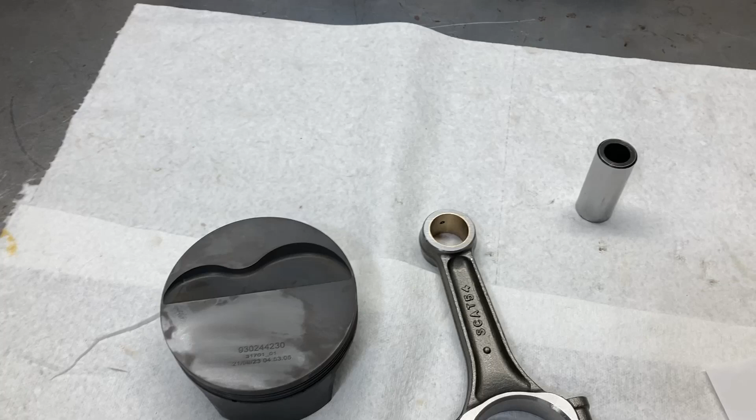Was it last week? I think we started a series on basic engine building techniques and theory and all that stuff. And this week I wanted to build on that by going over piston compression height and rod length, and thinking outside of the box on a given engine build.

And the reason why I decided to do that today was I got this piston rod assembly in for a Ford 289 build that I'm doing for a customer for a Shelby 289 Cobra build. And we are building this engine as numbers matching and period correct on the outside as we can possibly get it. And on the inside, we're going to employ a whole lot of new age engine technology and building techniques. So that would include roller cams and Mahle pistons, with a modern ring pack and that sort of thing.

So this is a piston for a Ford 393 Windsor, which is a stroked 351 Windsor. So if you're wondering how in the world can Brent use a piston that's for a 393 Windsor, which is a 9.500 deck, how can he use a piston for that in a Ford 289, which is an 8.200 deck, and the stroke is different and everything else? Well, we're going to go over that right now.

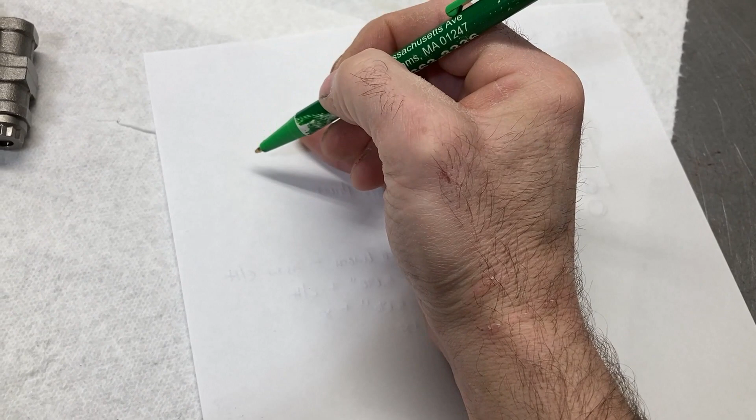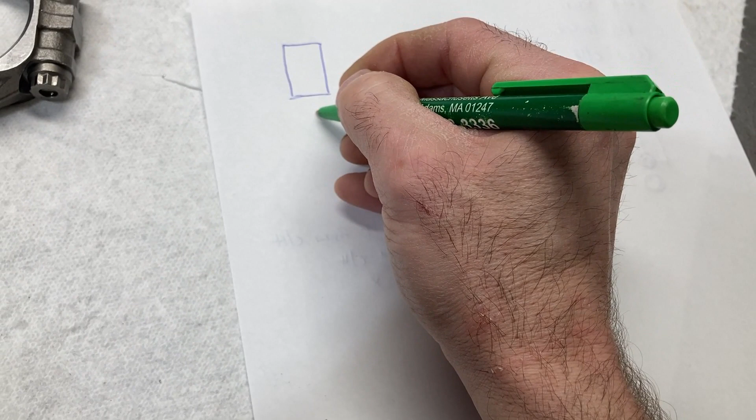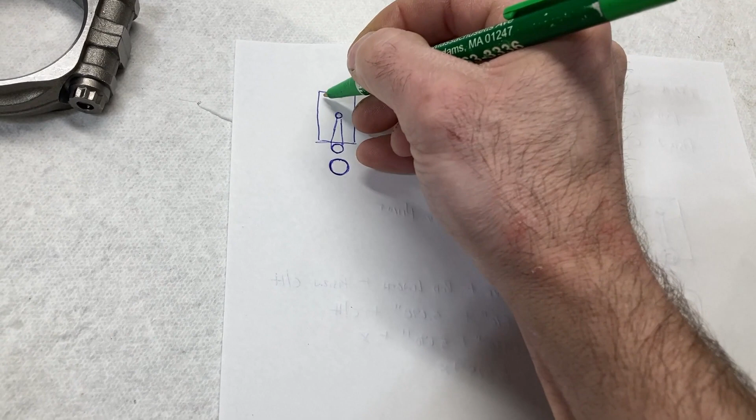So for any given engine combination, you have a block deck height. The definition of a deck height is from the center line of the main to the top of your block deck. So if you think of a traditional V8, and I'm going to turn it upright, and this is your cylinder, okay? I'm not an artist, keep that in mind. We will say that this is your crankshaft center line. So your rod throw would be somewhere around in here, and you would have a connecting rod with a little end, and then you have your piston. There's your wrist pin. Very crude, I know.

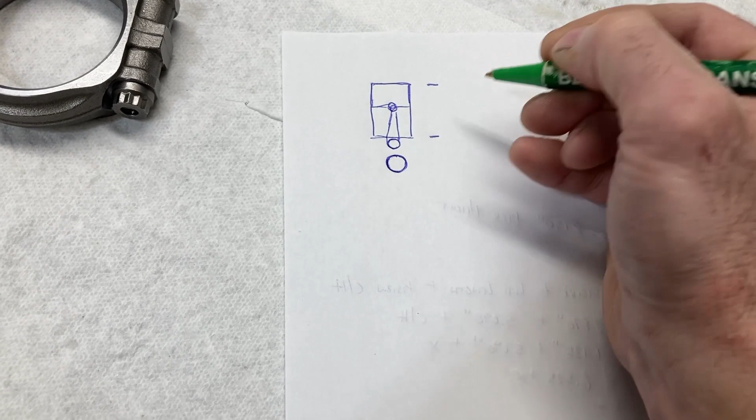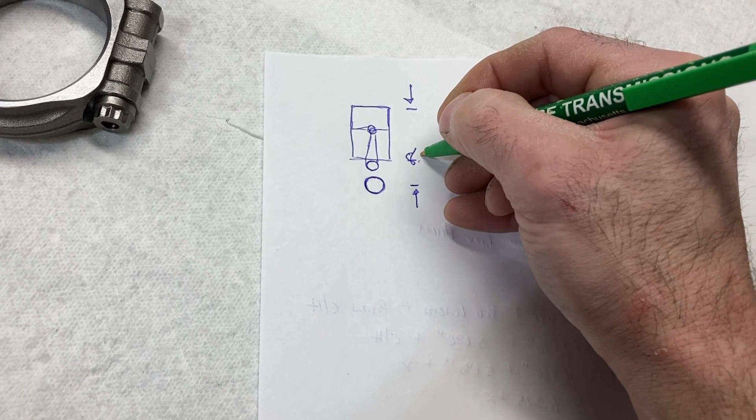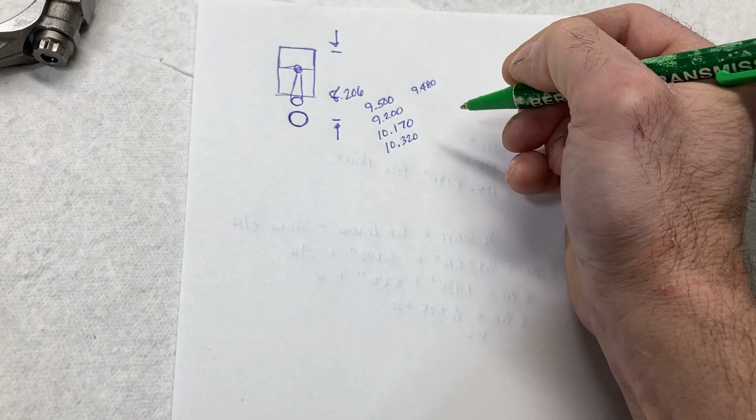So deck heights, actually that should be down here. Your deck height varies depending on what block you're using. A Ford 289 or Ford 302 is generally listed as 8.206. A 351 Windsor, as we mentioned, is 9.500. A 351 Cleveland is 9.200. An FE is 10.170. And we'll come back to this. Early Windsors were actually also 9.480. Your 385 series stuff, like your 429, 460, they had a couple. 10.320 is pretty common, but that is, again, the measurement from the center line of the crankshaft to the top of the block deck. That is your constraint.

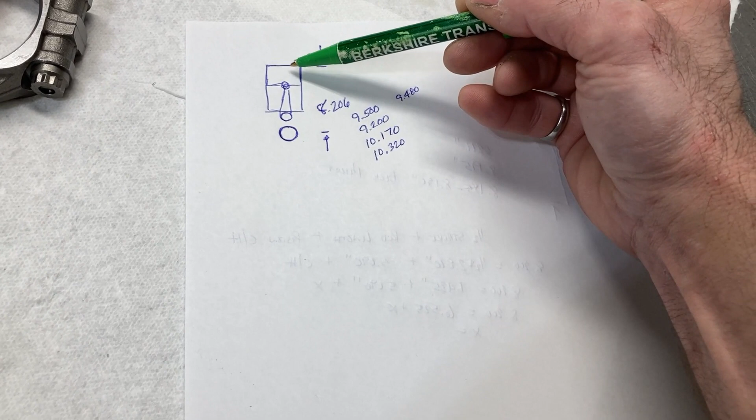That is the amount of distance that you have to fit a connecting rod, a piston, and by definition, half your stroke. So when you think of it that way, I've got so much room, and I've got half stroke, and I've got my rod length, and I've got my piston compression height, that's going to equal block deck height.

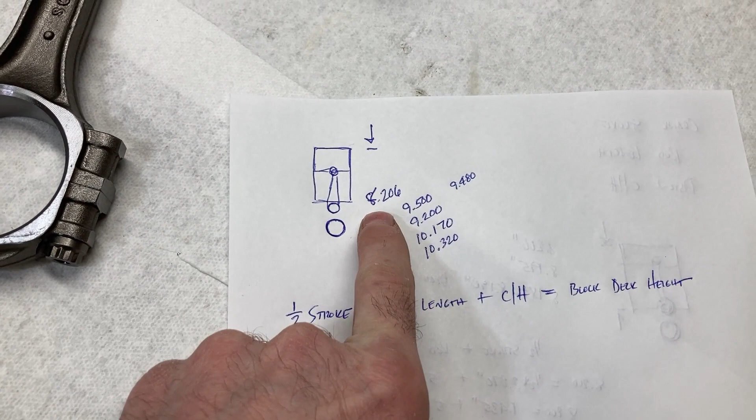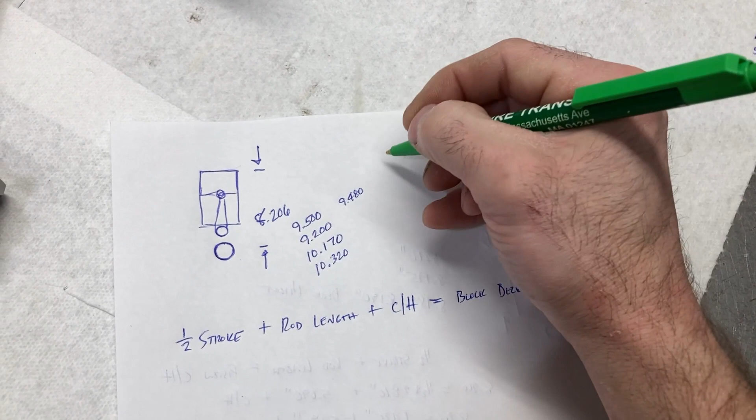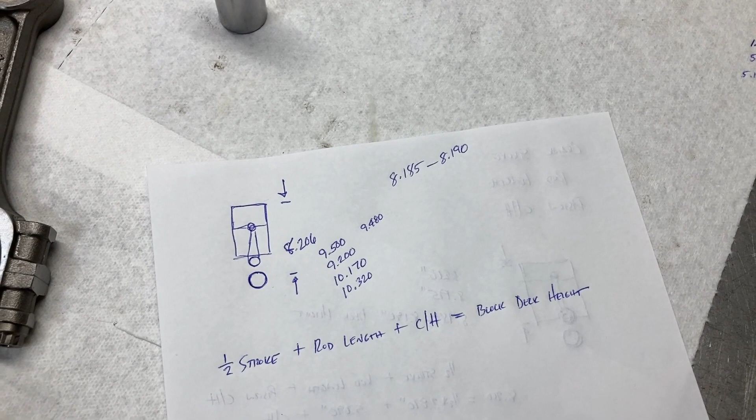Now, in this particular build, I am using a 289 block. Like I said, from the factory, they're listed as 8.206. I've seen those all over the place, because factory blocks are not known for machining tight tolerances, and sometimes they're out 20 thousandths from front to back, and sometimes they're a whopper-jawed mess. So what I do is I have my 289 and 302 blocks generally machined to 8.185 to 8.190, and that generally gives me enough room to counter any bad machining techniques that the factory had back in the day.

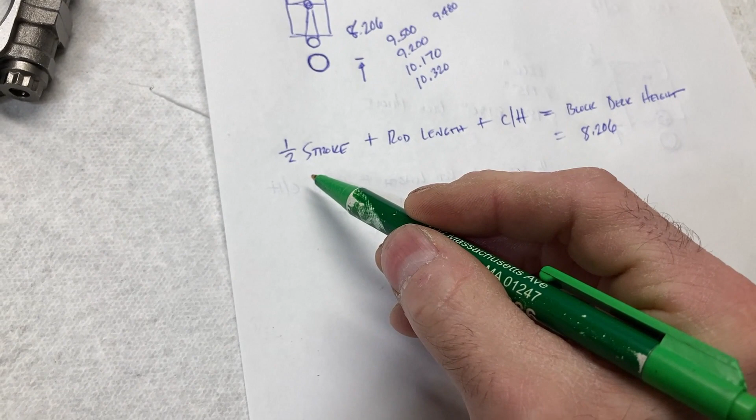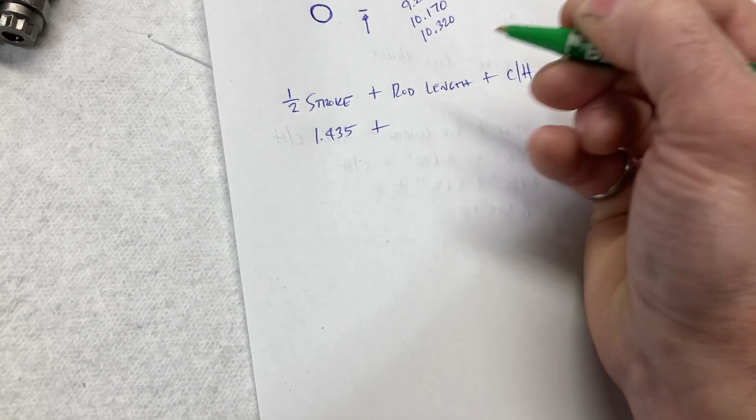So for this particular build, let's do this first. We'll take the factory block deck height as listed, and let's look at a factory 289 piston compression height. So half the stroke: a 289 stroke is 2.87. Half of that is 1.435. A factory 289 rod length is 5.155.

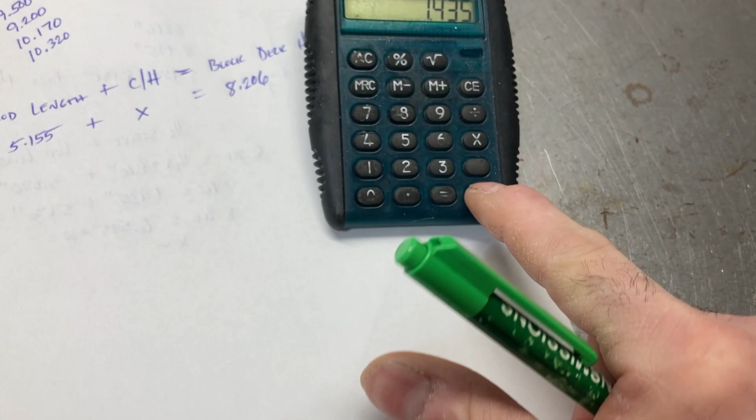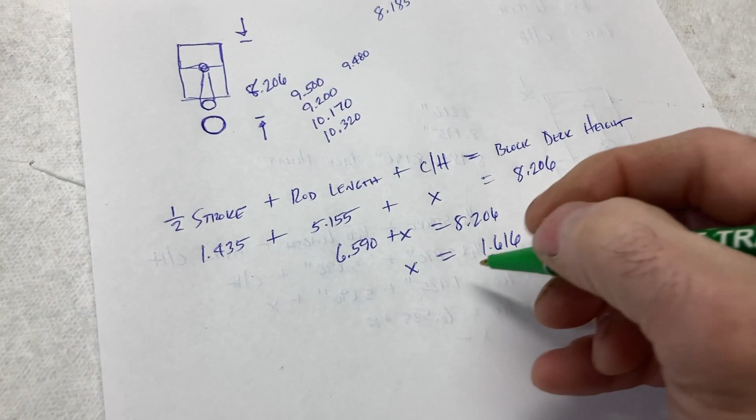We're going to solve for X. So get our handy dandy calculator. We have 1.435 plus 5.155. That's 6.590. Plus X equals 8.206. So our compression height for a factory 289 piston should be 1.616. And if you look in the catalog, you will generally see that factory piston compression heights were around 1.600.

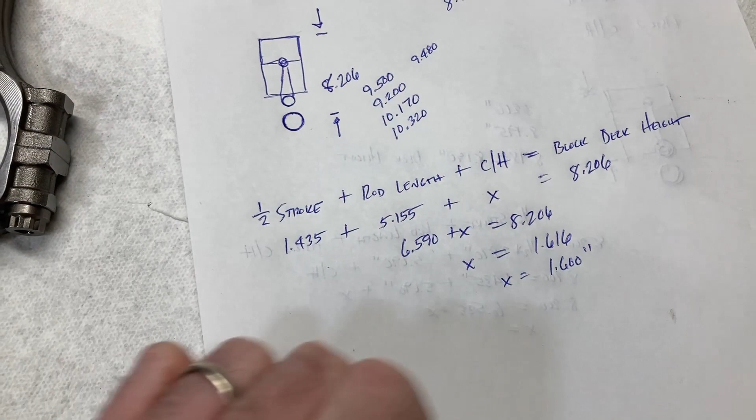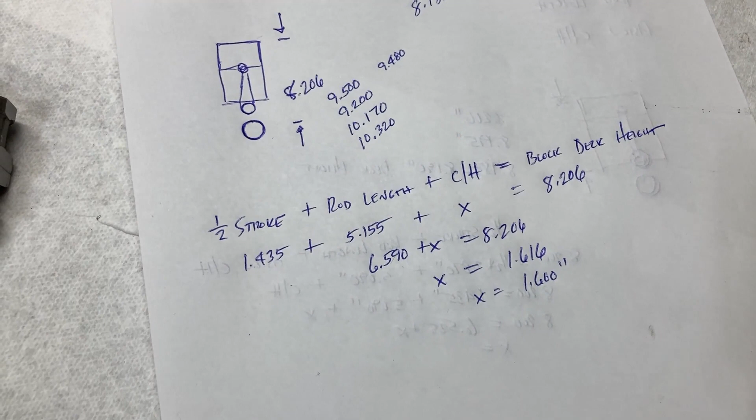Okay, and you have machining variances in that. You have the fact that your piston is probably going to be down in the hole a little bit, so your factory pistons are going to be around that height. I like to see pistons at either zero deck or a little bit hanging out, and that's generally what I aim for. But let's look at why this and this will fit in our 289 block.

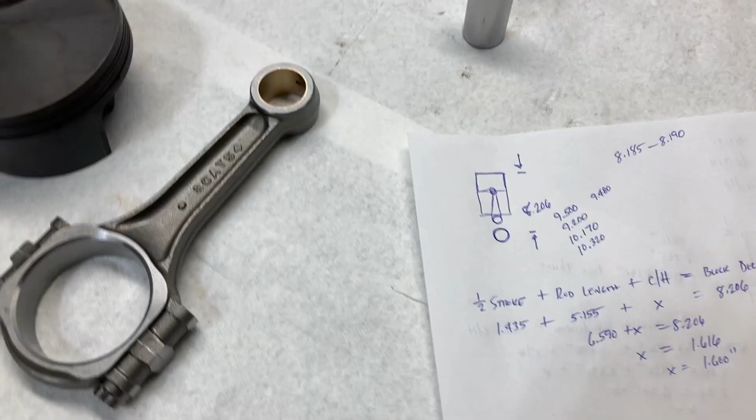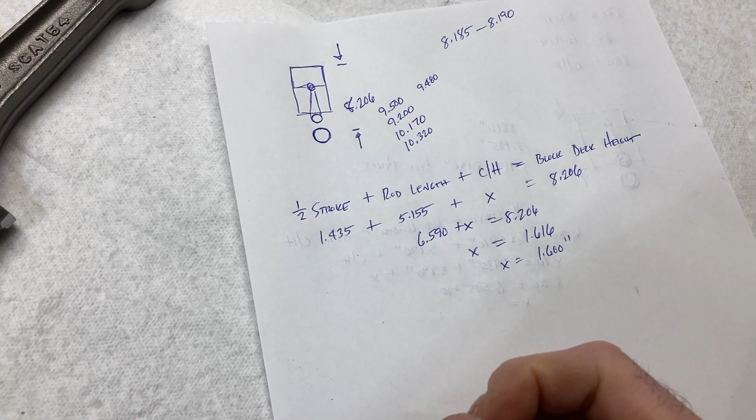Again, this is a piston for a Ford 393 Windsor. This is 1.350, okay? This is a rod for our build. It's a Scat rod. It's 5.400. So let's look at the math on why this is going to work out. So we will use our block deck height of 8.185.

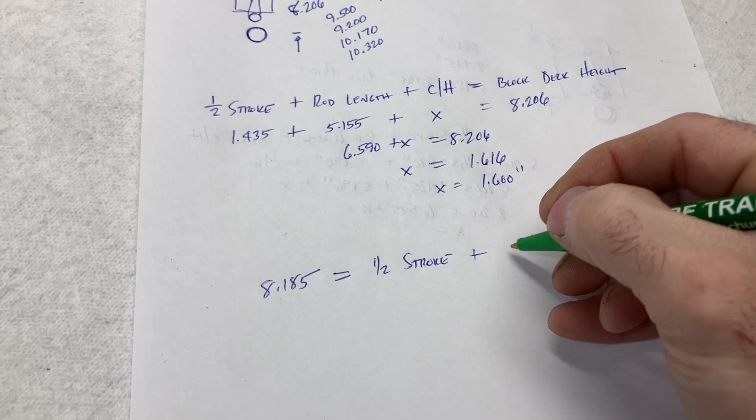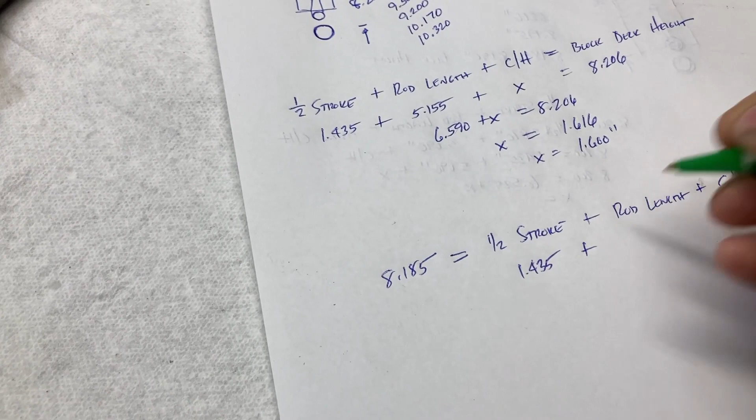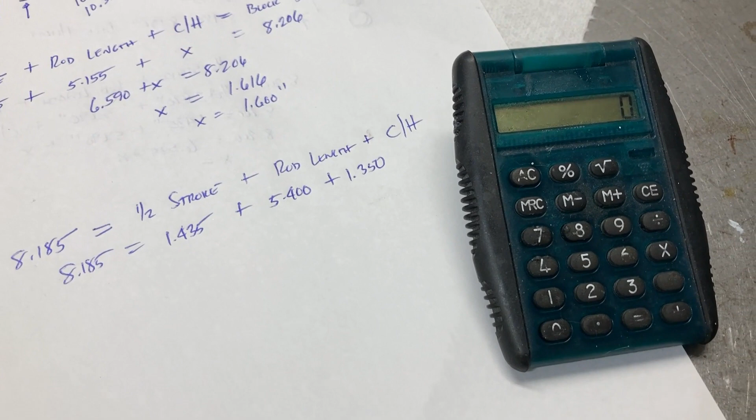And that's going to equal half our stroke plus our rod length. I don't know why my camera keeps going in and out of focus. Plus our rod length plus our piston compression height. Half stroke, 1.435. This is a 5.400 rod and a 1.350 piston. So when I add all this up, I should get our block height, our deck height, and it should be at 0 deck. So let's do the math.

I generally try to use the longest rod and the shortest piston that I can for a factory build within the constraints of safety and longevity. I like longer rods; from experience, they give more torque. And as a matter of fact, in past 289 builds in some road race stuff, I have used a 5.700 rod. And it was a small block Chevrolet rod. It took a lot of extra machining, took some specialized bearings, and it took a really short piston to make that work. But it made a whole lot of torque.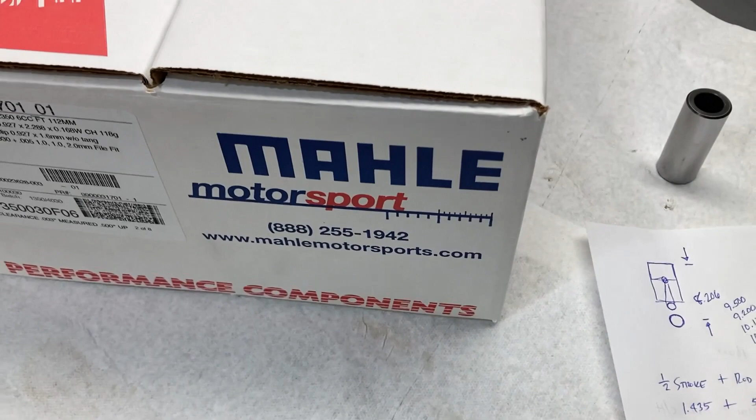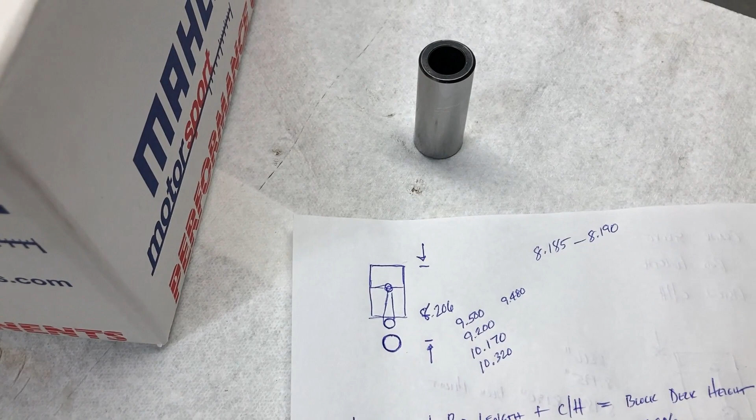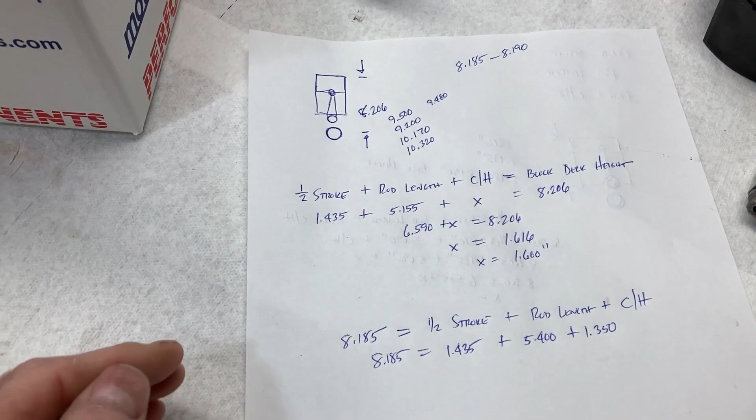So if you learn to think outside the box, when you see a piston compression height, this one's listed 1.350, you shouldn't think, oh, well, that's a 393 Windsor piston. Well, it is a 393 Windsor piston because it fits within the constraints of our 9.500 deck and a 6.200 rod. But this piston doesn't know that it's a 393 Windsor piston. All it knows is it's a piston. And this compression height may work with other rod and stroke combinations. And when you're able to think outside the box, then you can use lighter pistons, you can use longer rods, or you can use different combinations than what you're generally used to thinking about.

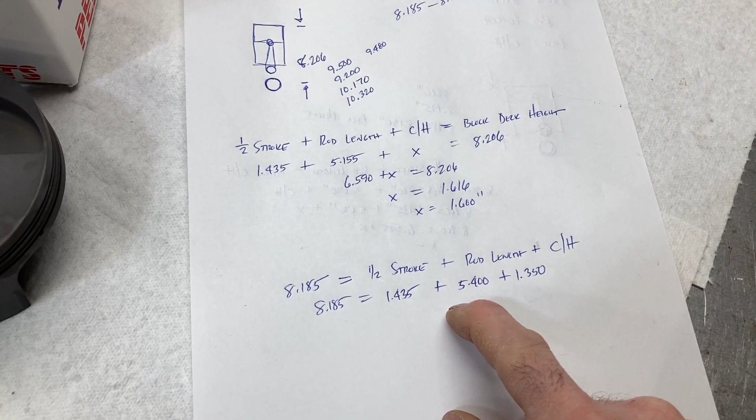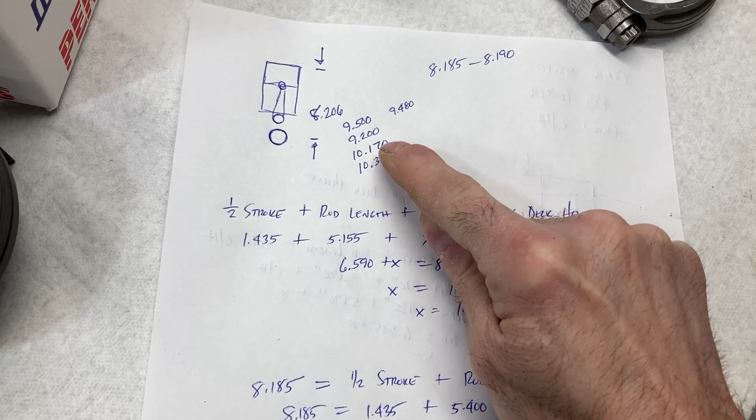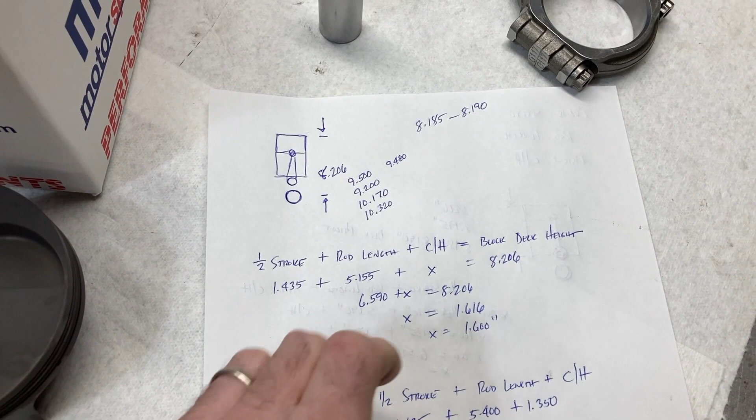This calculation also helps when you're dealing with a block that's been decked a lot, and sometimes when we're messing with some old factory blocks, they've been whacked really hard. So, like I said, on an FE, 10.170 is factory deck height. I have had FE blocks that came in at 10.135 because they have been cut so many times. So when I order custom pistons, I have to go through this calculation to see what compression height and rod length I can use to make the application work.

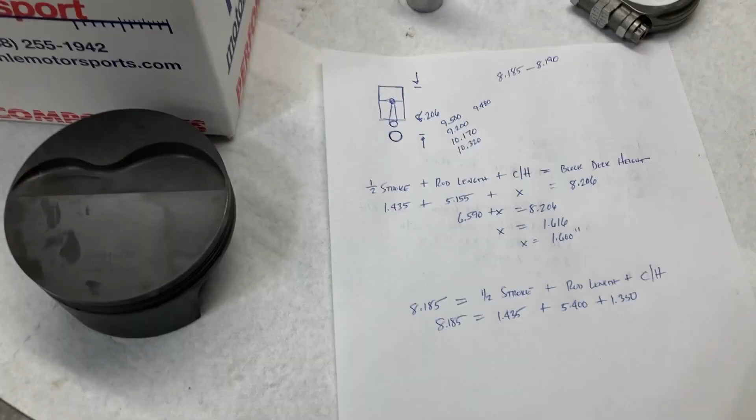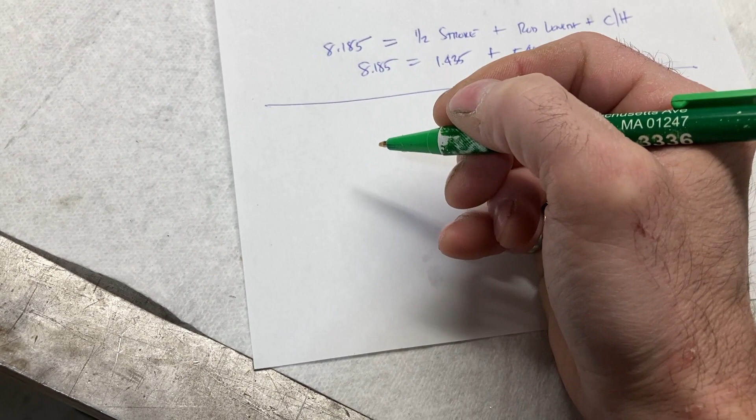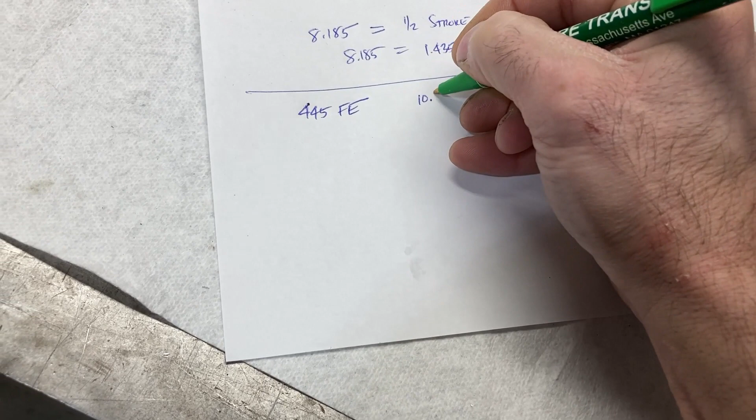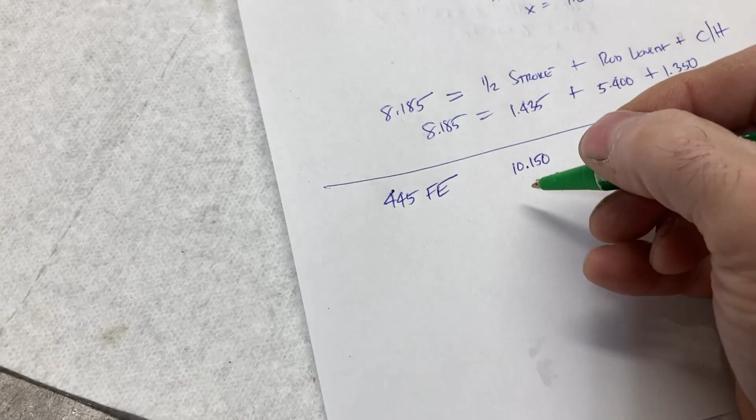So in school, they teach you by repetition. So let's go over a couple of different scenarios. Let's work with a 445 FE. 445 FE, we know that the block deck height from the factory is 10.170, but generally I have those cut down to 10.150 just because of factory tolerances and how horrible they were. We know that a 445 is a 4 1/4 stroke crankshaft. So let's look at a couple of different things.

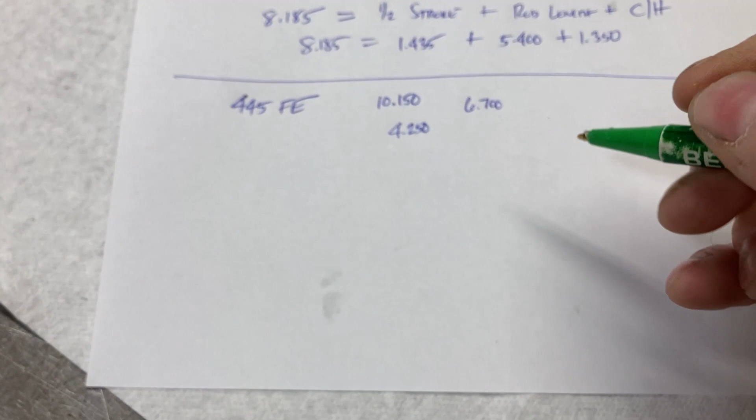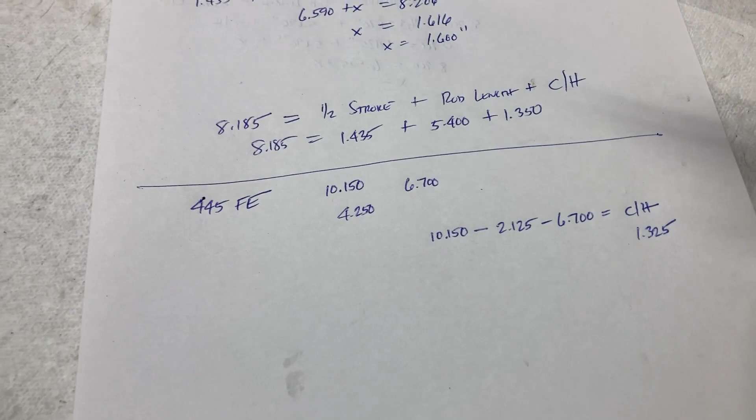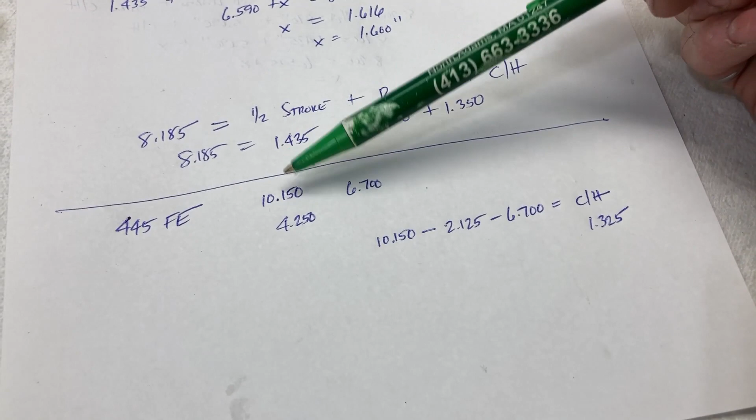If we used a 6.700 rod, let's do the math. So 10.150 minus half of our stroke, which is 4.250, so 2.125, minus 6.700, that should give us our compression height. So let's do some math here. 10.150 minus 2.125 minus 6.7, 1.325, and that is a pretty common compression height if you look around at both 445 pistons and 482 pistons. And the 482 pistons are the same compression height because the block is the same deck height, the stroke is the same, and it's typically used with the same rod length.

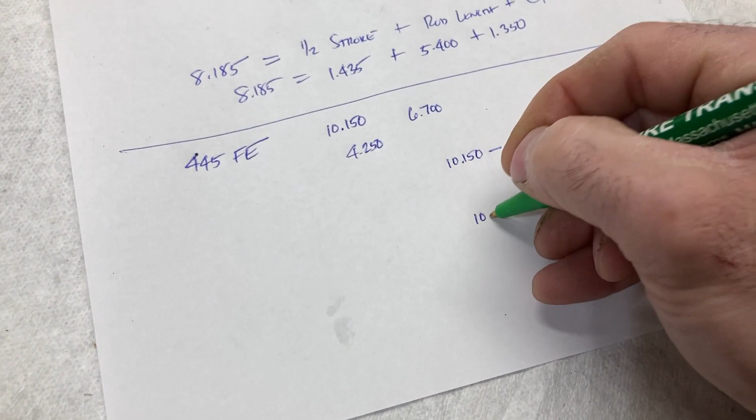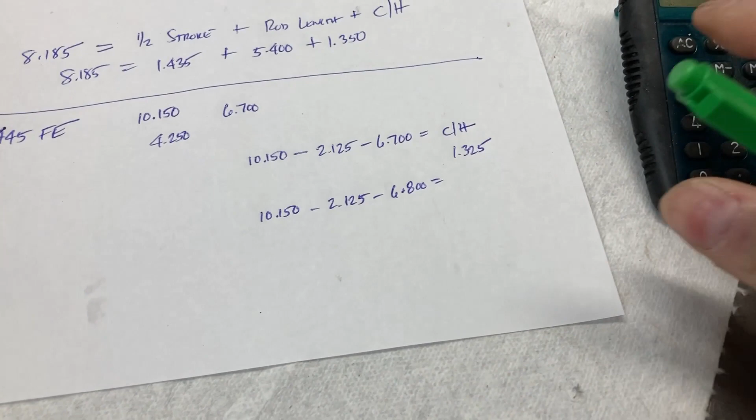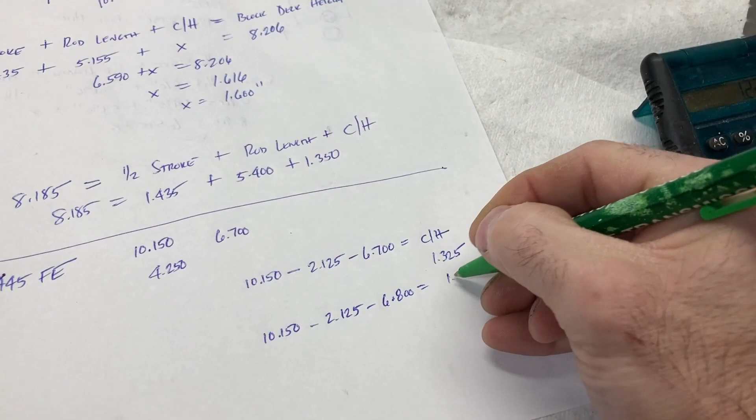So what happens when we use a 6.800 rod, which is also a little common? What does that do to our piston compression height? 10.150 minus 2.125 minus 6.800. That gives us a compression height of 1.225. And this is also a combination that I work with. You don't see that as common in the aftermarket, but this is a viable compression height to use for a thinner ring pack in a higher performance application. All right, one more example.

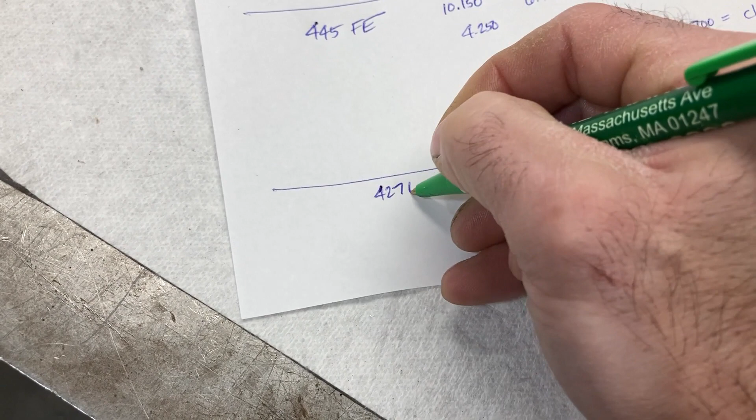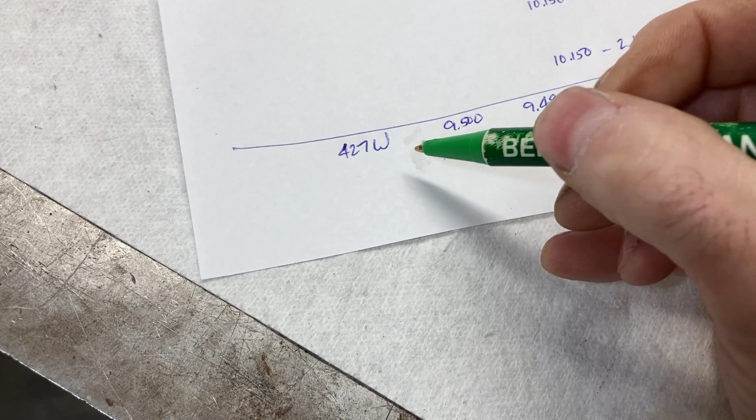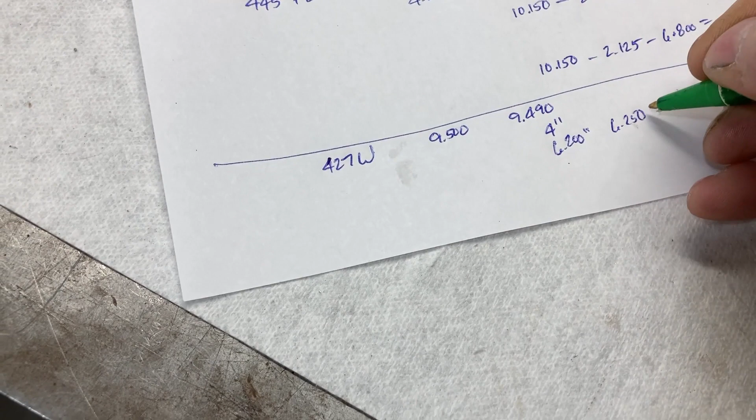Let's do a 427 Windsor, okay? Factory deck height for an aftermarket block or a factory 351 Windsor block is 9.500. I normally have those cut to 9.490. A 427 Windsor uses a 4-inch stroke. With a 4-inch stroke, you can either use a 6-inch rod, a 6.200 rod, or a 6.250 rod. So let's do the math on that.

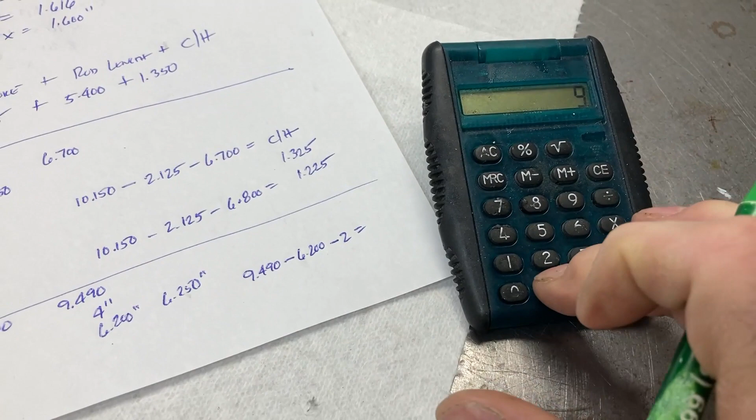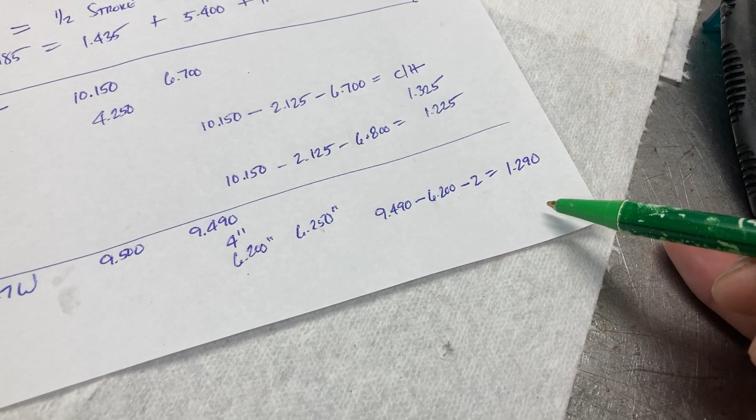If we do our 6.200 rod, half of our stroke is 2 inches. So what would that be? 9.490 minus 6.200 minus 2: 1.290. So you'll find a lot of aftermarket pistons in the 1.280 and 1.290 range. If we use a 6.250 rod, what does that do for us? 9.490 minus half of our stroke minus a 6.250 rod: 1.240.

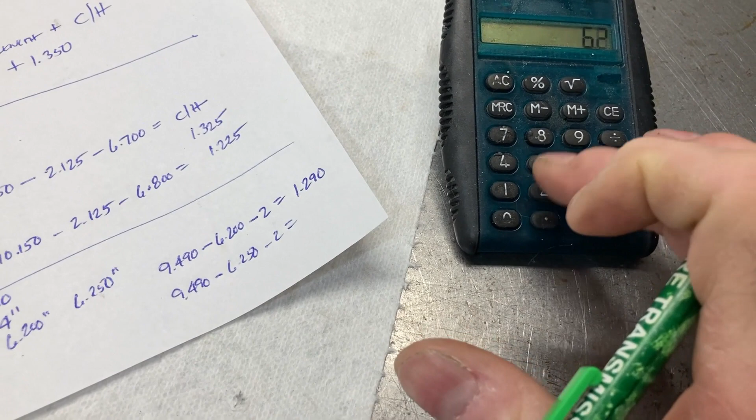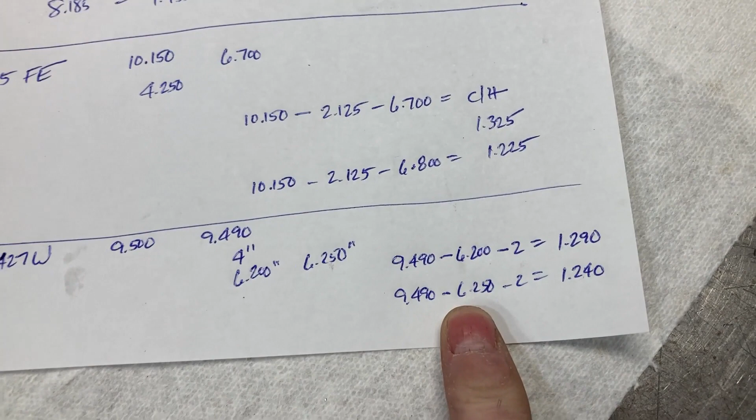So you end up with a shorter piston, a longer rod. You could possibly end up with more torque, and you end up with a lighter reciprocating mass hanging on the end of your rod and crankshaft. So win-win for everybody on that. So you may be wondering what kind of wild combinations I have come up with when thinking outside the box, doing dyno mules, that sort of thing. I'll put up the link to one of my 351 Cleveland dyno mules. Let's do the math for this, and we'll show what worked for this build.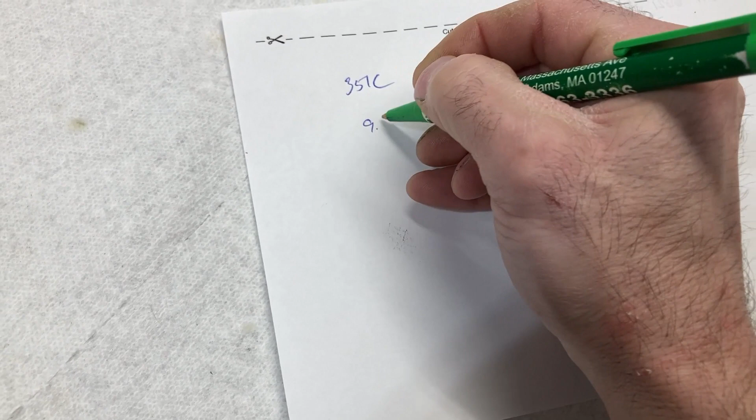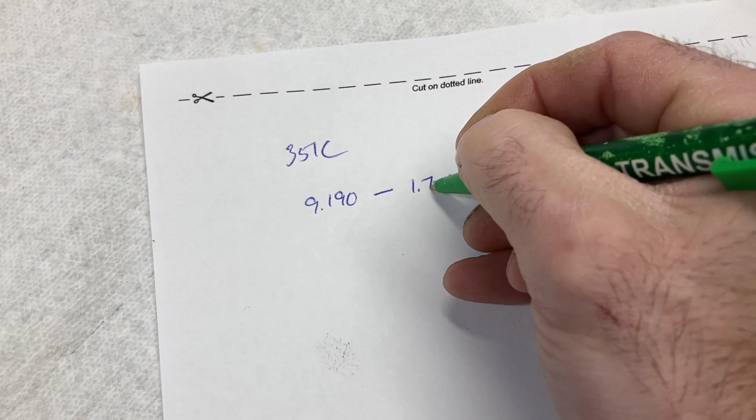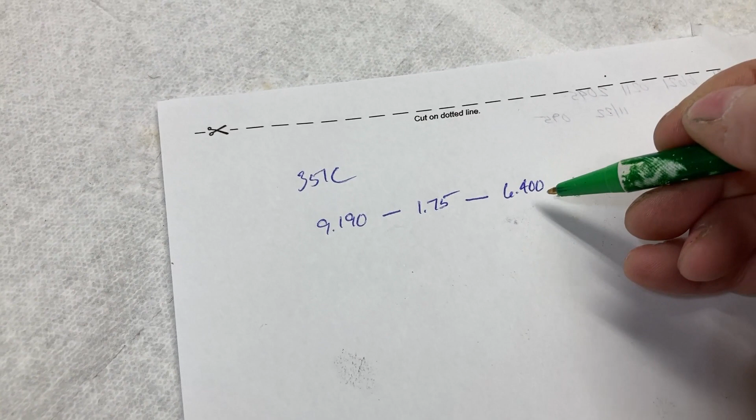So a 351 Cleveland, factory deck height is 9.200, but I usually have those cut to 9.190. Factory stroke for a 351 Cleveland is 3.5 inches, so half of that is 1.75. I used a 6.400 rod in that engine. Typical factory 351 Cleveland rod length is 5.780. Guys typically reach for a 6-inch rod when doing a Cleveland. So I use a rod that's 400 thousandths longer. So what would our piston compression height be? If we do the math, 9.190 minus 1.75 minus 6.4: 1.040 compression height.

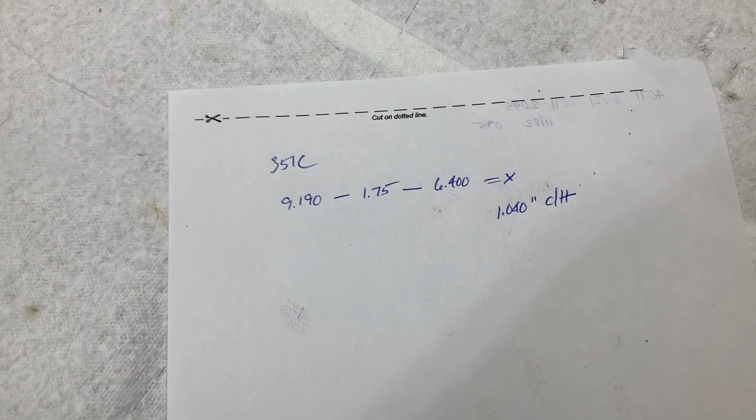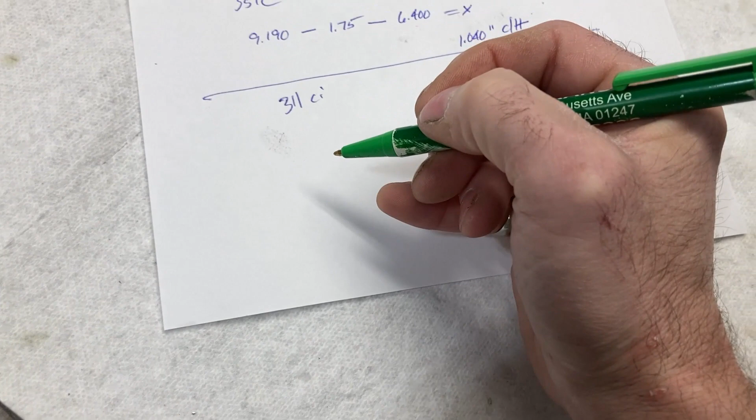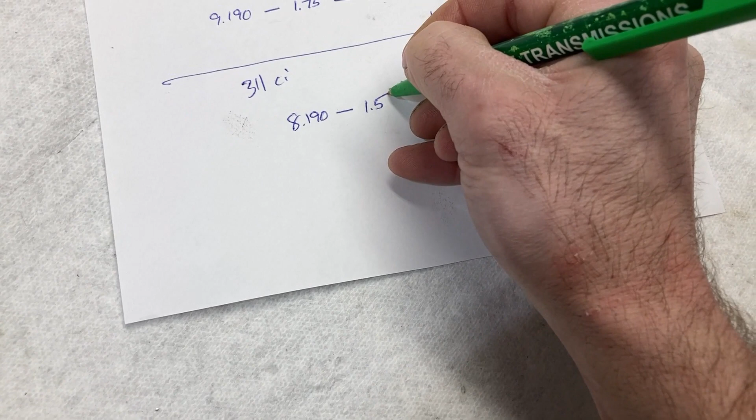That engine, if you'll look in the video, made about 615 horsepower. I think there was another pull that we didn't do a video on that made 620, but it also made a whole lot of torque, and it had a really light rotating assembly. So one other combination, the 311 cubic inch dyno mule that I'm doing right now. It is a Ford 302 block, and it has been cut to 8.190. It uses a factory 302 stroke, which is 3 inches, so half of that is 1.5. I'm using a 5.700 rod. So what's going to be our compression height on this one?

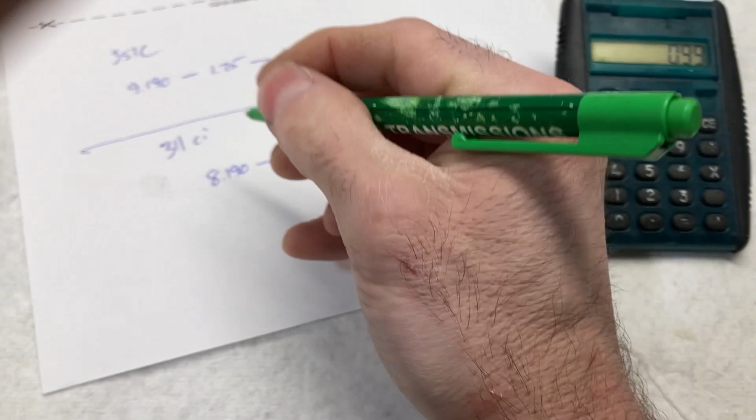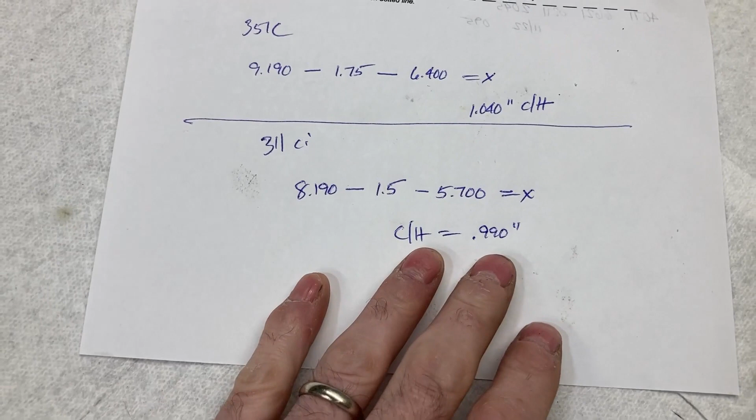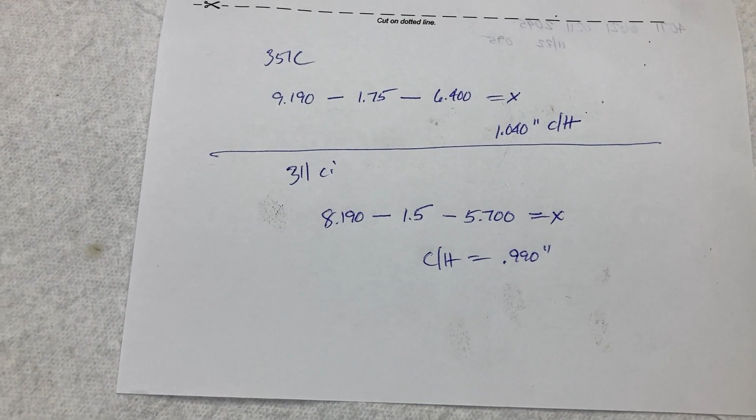And you guys are going to flip your lid when you see this. Minus 1.5, minus 5.7. Our compression height is 0.990. So the center line of the wrist pin bore to the top of the crown is less than 1 inch. And I think this is the shortest piston that I've ever used. You see a lot of stroked small block Chevrolet stuff available in a 1-inch compression height, and this is under that. So when you think outside the box, you get to try different things and you find different combinations that work.

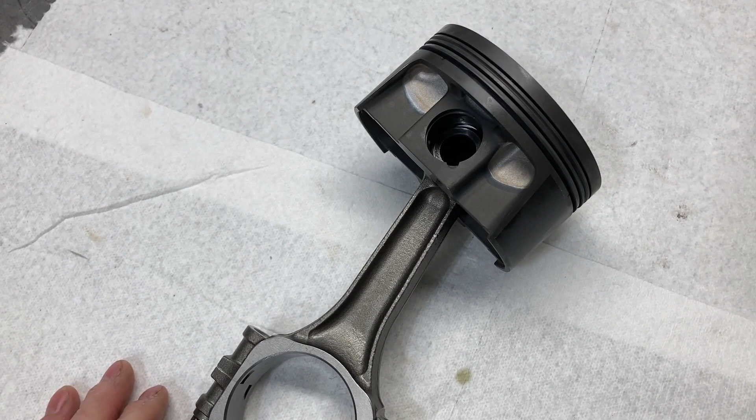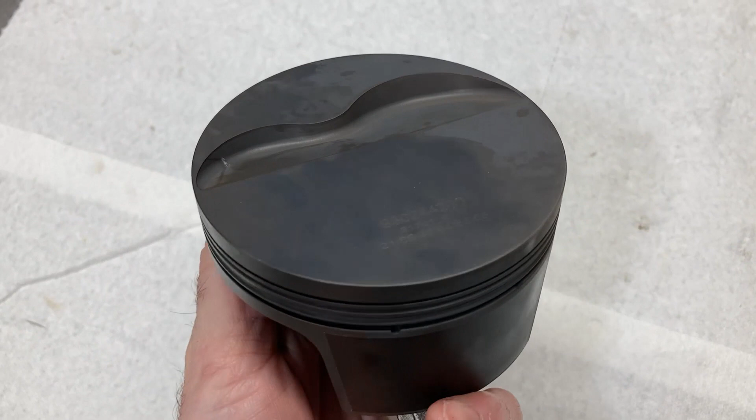So when we think outside the box, we can open up whole other ways of doing things when it comes to putting together your rotating assembly. And by doing so, I was able to use this modern Mahle piston with a 1mm, 1mm, 2mm ring pack. It uses a small block Chevrolet wrist pin size instead of a 912 small block Ford size. That gives us more strength in the wrist pin area, and since it's a bigger hole in our piston, it makes our piston lighter. Okay, so I've ended up with this rod piston combination for this 289 build, and that'll make it a really nice addition for the crankcase of our engine and some higher technology parts in the bottom end. All right, guys, I hope that some of that made sense.